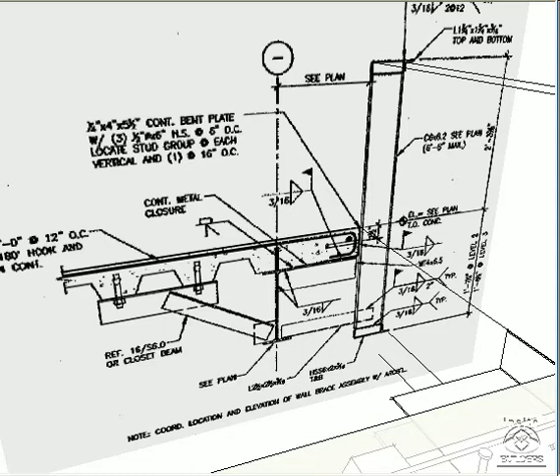Note again that the slab edge is in cantilever over the top of this beam. There is a back angle right here that ties backwards into the decking. All of this is welded to steel channels and steel tubing top and bottom for the parapet.

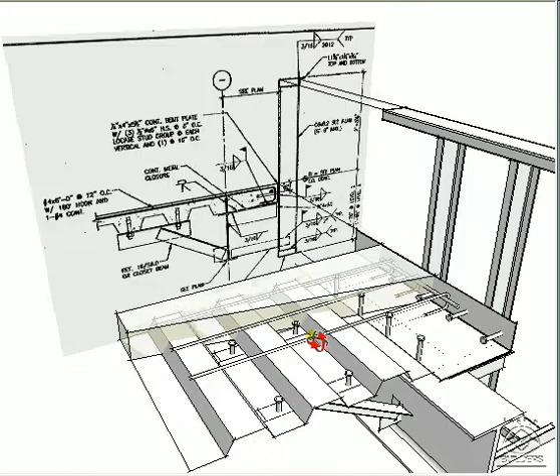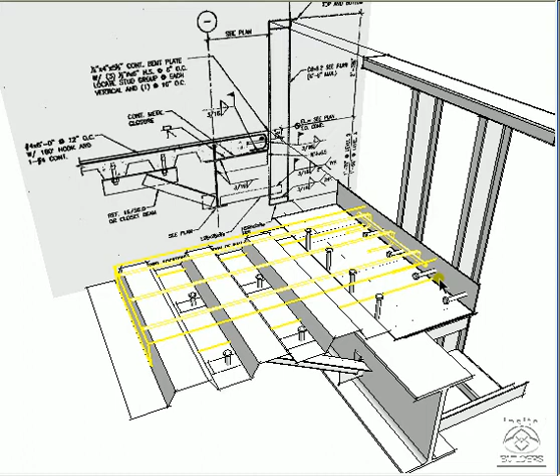What I'm going to do is take this apart and then put it back together again by simply hiding some of this information to see the layers of the construction underneath. This is the lightweight concrete deck. Here are those hook rebars around this continuous edge rebar that we saw in the other Shorty.

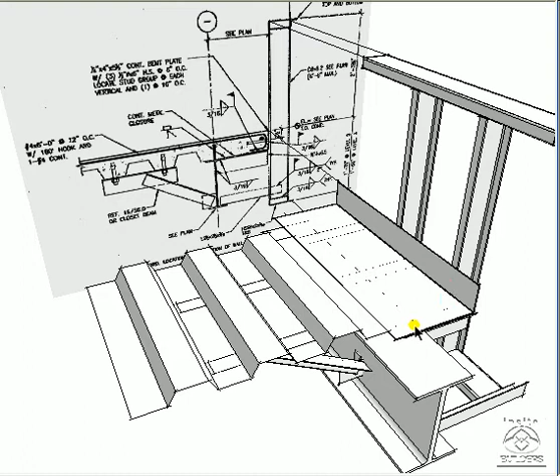These studs are welded through the plate, through the decking, into that perimeter beam. Note that the studs also come out of the face of the edge plate. Here's the edge plate. This contains or forms the edge of the concrete. The steel decking comes in sheets and is laid across the bar joist.

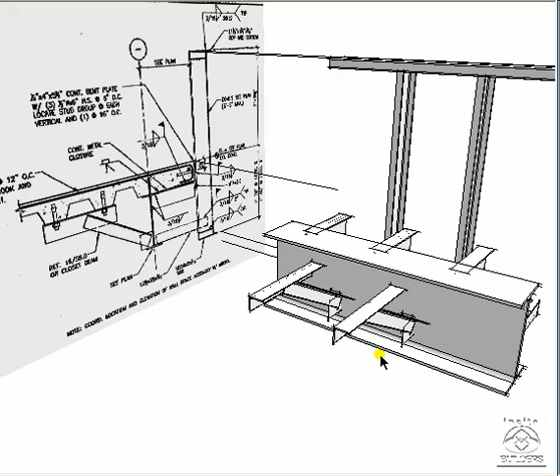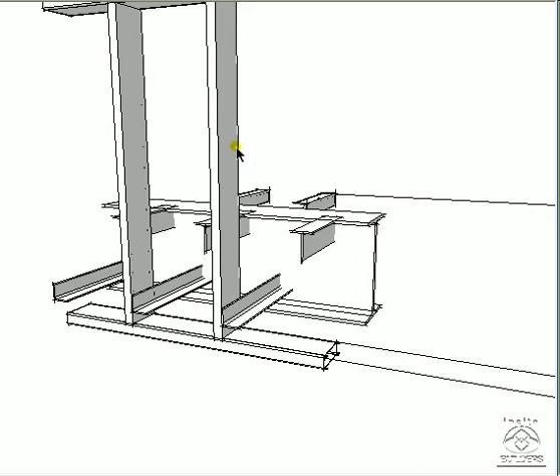Here's the underpinning. These are angle supports welded to the inside face of the perimeter beam and then attached to the underside of the steel decking. On the opposite side we see the same kind of struts coming out and grabbing the channels, vertical channels of the parapet. These T's support the edge plate.

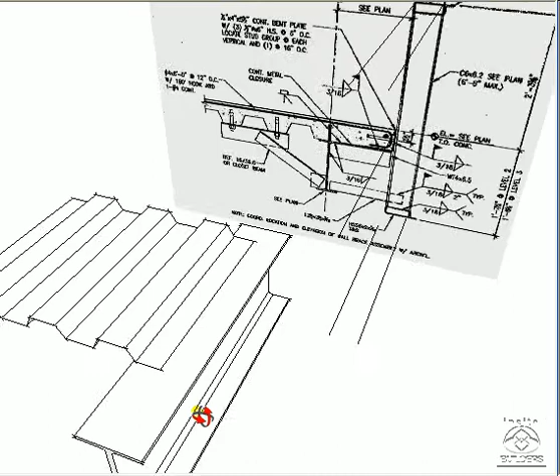So to build this parapet, one would have the beam in place, decking over the top of the beam, install the edge plate over its brackets, probably install the stiffener brackets for the parapet at the same time, then attach the parapet framing,

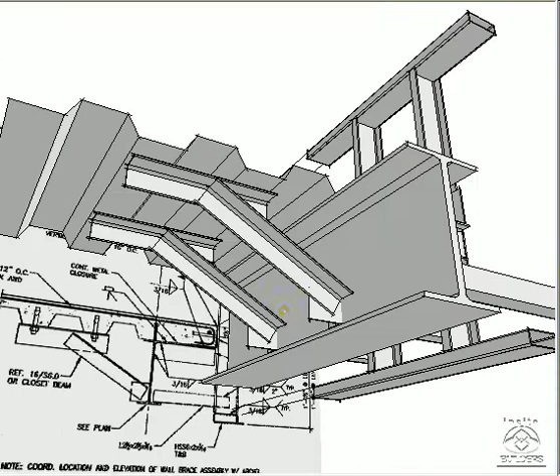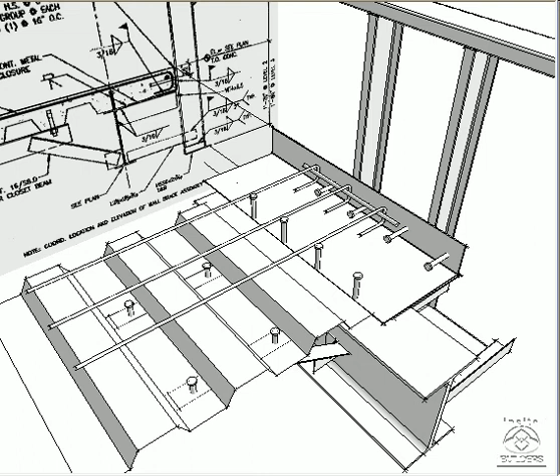install the back brackets under the decking. This would include the studs holding those brackets to the decking, these shear studs, and the studs on the face of the edge plate. Install the reinforcing, and finally pour the concrete. That would be the construction of the parapet assembly all along the face of the roof line.